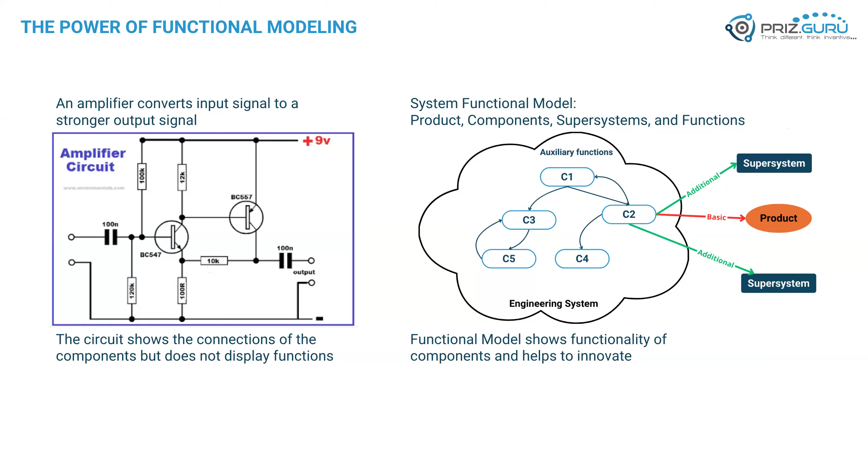As a definition, the functional modeling is an analytical tool that helps us define what matters - this is how we decide to call it. First of all, we learn how the system works in very small details, or in the details that we decide to go into. It defines the functional rank and problematic rank of each and every component, which is very important, and we'll talk about that in a moment.

It helps us solve problems as a result, because without understanding how the system functions, and without understanding what the system is even built for and what each component is built for, we can't make any decisions and of course can't improve the system. So functional modeling helps us do that. And of course it impacts what matters, because what we've seen - and I'm sure everybody in this room has seen it many times - people make changes to their systems all the time, but do these changes actually matter? Do they actually provide value? Many times the answer is no; we're making changes for the sake of changes and not for the sake of actually improving something.

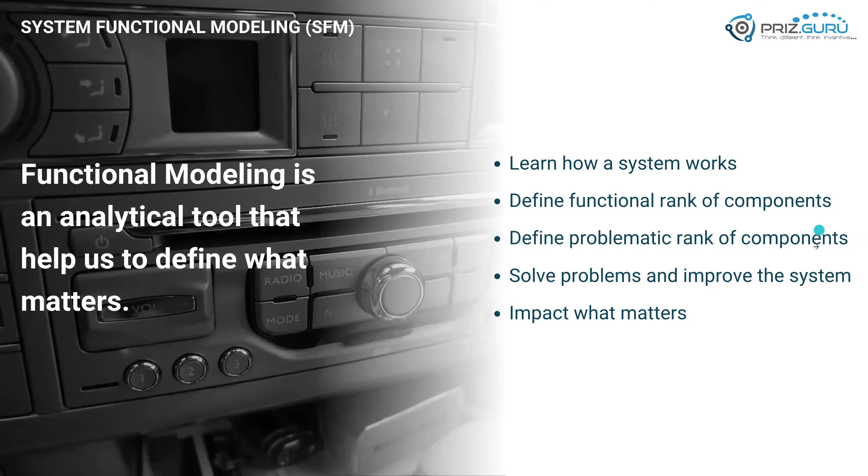Now let's talk about the fundamentals of functional modeling and how it's built, since we wanted to be a little bit more practical in this webinar. The core concept of the modeling is always the interaction between two components when you have a function between them. Usually one component applies a function to another component. It's as simple as subject, function, object, or function, subject, action, object.

So subject and object - the subject in this case is the carrier of the function, whoever is providing the function. And the object is whoever receives the function. The subject and object are the components that have the interaction within the system, where a function - and this is a very important definition - is something that changes a parameter of another component or of an object.

Did I miss something here, Anatoly? No, everything is fine.

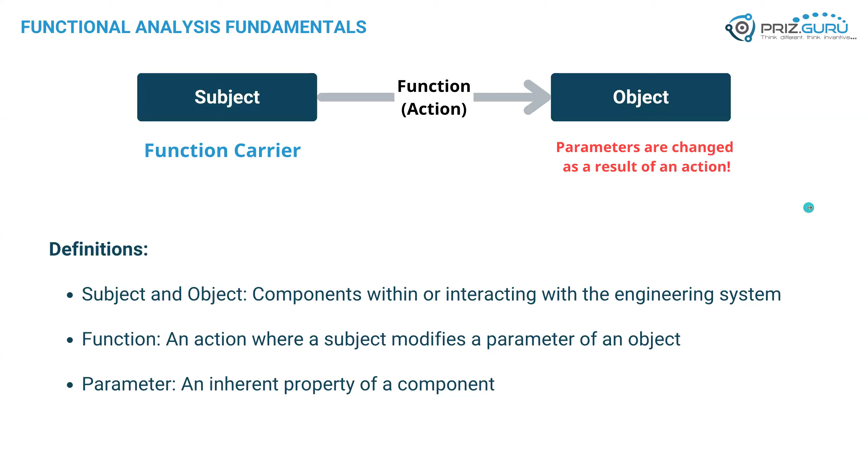So, subject, action, object - it's actually a very powerful thing, and we can call it in short the SAO, if anybody will. But when we're defining the subject, action, object, like the example here - the car moves a person -

the power here is that it actually defines two things. First of all, it defines the problem that this thing solves - we're solving the problem of moving a person. That's very important to understand. The other thing is it shows us the solution of how we actually do that - we're using a car, the car moves the person. So we have both of these things in this one formula: the problem we're trying to solve, and the solution of how we're solving it in this particular case.

But what does it mean? It means that once we understand the problem we need to solve, there's potentially much more solutions that we can apply to solve this problem. We can move a person not only by a car - we can use a truck, a person can walk. There are so many ways that we can move a person.

But also, car moves a person doesn't necessarily mean that this is the only thing it can solve. It can solve other things like moving cargo, moving different loads, mail, you name it. So this is a very powerful thing to understand - once we have that definition, we can be much more mindful about the problems we're solving and the solutions we can apply to it.

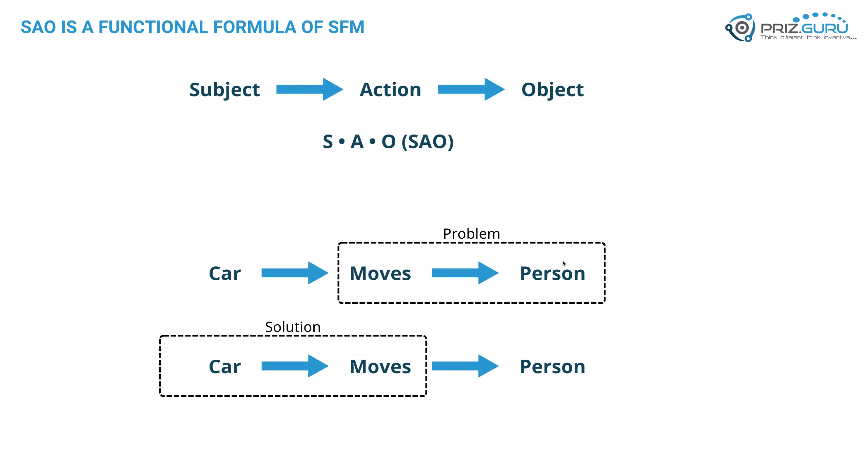So let's define a function, first of all. The function of a subject always results in a parameter change of an object. Again, that's a very important thing to understand - if there is no parameter change as a result of a function, it's not a function. Period, end of story.

If we're thinking about a beer - something that Anatoly likes to give as an example - it's not a function, because it doesn't change a parameter of anything really. But if we're drinking that beer, then yeah, we're potentially moving that beer and so on. So if we're following this rule, it's actually very easy to understand what is a function and what is not - it has to do with the parameter change of an object.

Now let's talk about the process of how we build a functional model. First of all, we need to describe the system that we're building it for. Something we've seen in a lot of engineering teams is that people don't necessarily think about a particular system - they dive into problem solving immediately without even understanding what the system or the problem space is in general. So we have to describe and understand in detail what is the system that we're trying to analyze with this functional model.

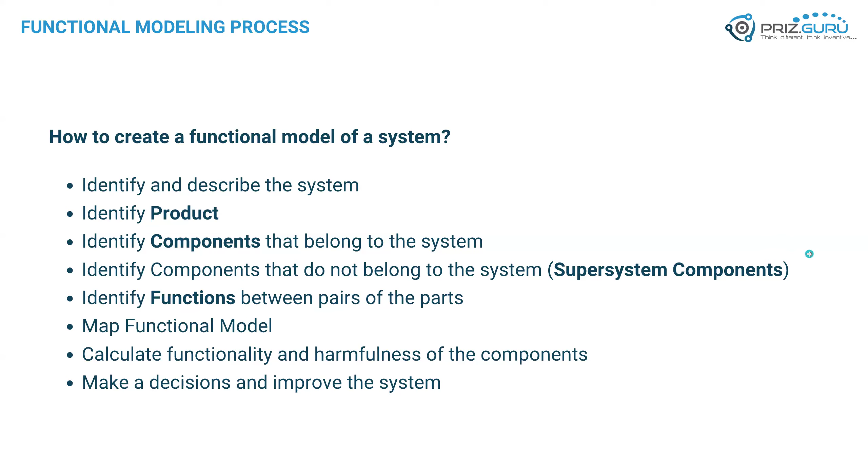Now let's talk about the product. We touched on this a moment ago, but how do you identify the product? First of all, usually there's one product for every system. It's a thing, service, or product that the system was built for originally, that it was designed for. Most engineering systems have only one product; we very rarely build a system with two products in mind. I can't even think of one at this point.

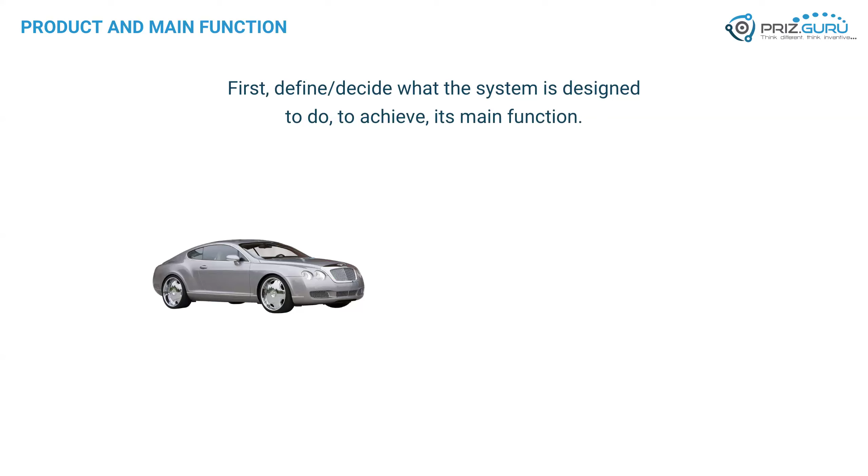Now, the product is the main function, what we call the basic function of the system. Let's take an example, a car. If the car is our system, what is the purpose of the car? The purpose of the car is usually transport — in this case, transporting people. So people must be the product of this system called the car. As you can see, the main function, the basic function from the system to the product, determines the actual product. And another thing we'll see in a moment: the product is always not part of the system itself — it's outside of the system.

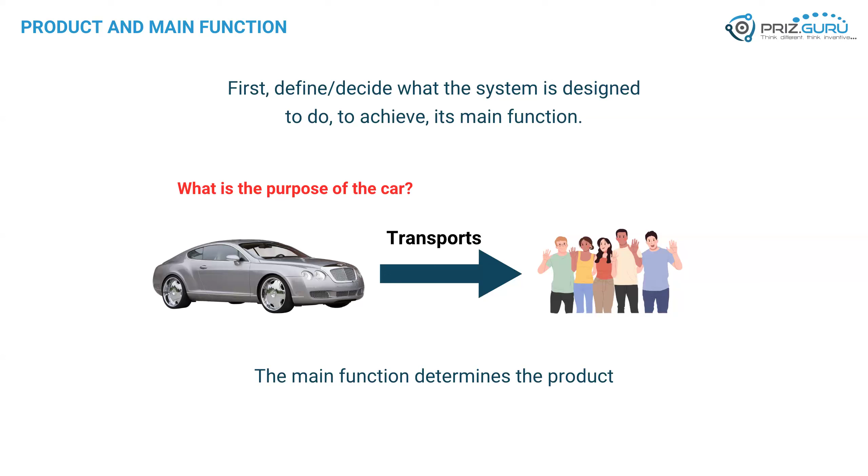Now, components, as an example, are something that builds that system. In this case, it could be wheels, brakes, transmission, the engine, and everything else that actually builds the car.

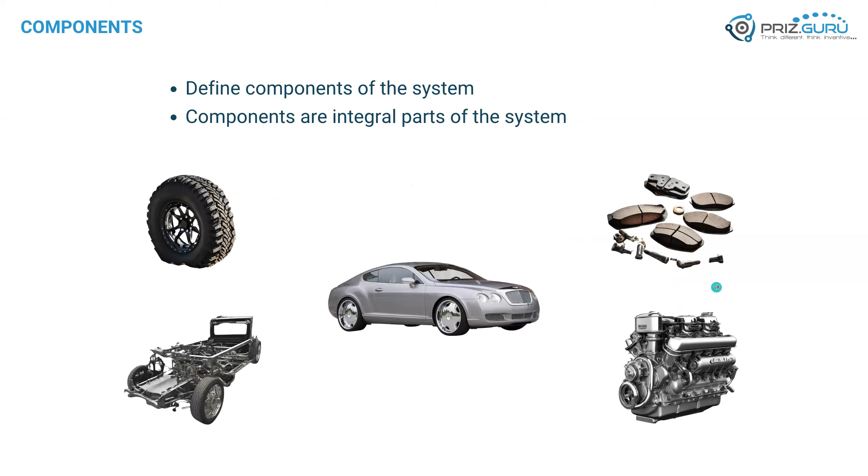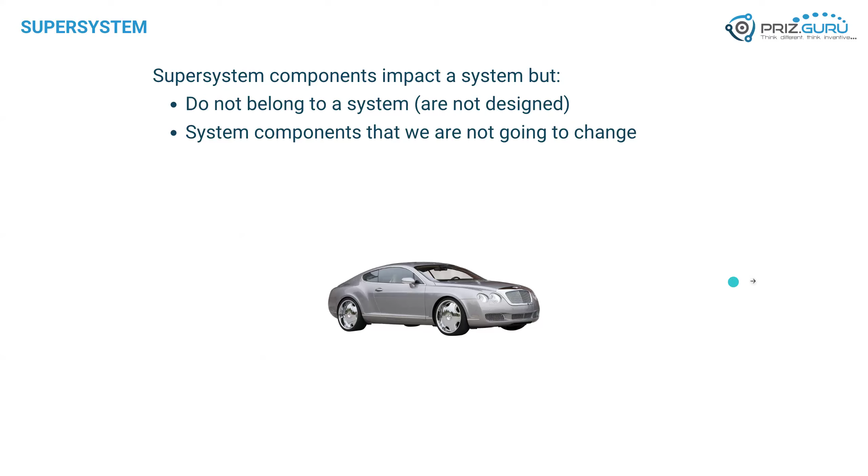Now the super system, as we mentioned, could be anything that affects the system, or in this case the car, or that the car affects — but we can't change it, we can't really control it in any way, and it's not an integral part of that system. Examples here: the air around us, rain or weather — not anything we can control. Pollutants, again around us, not necessarily what we produce. The road we drive on, and so on. There are potentially so many examples in just a car.

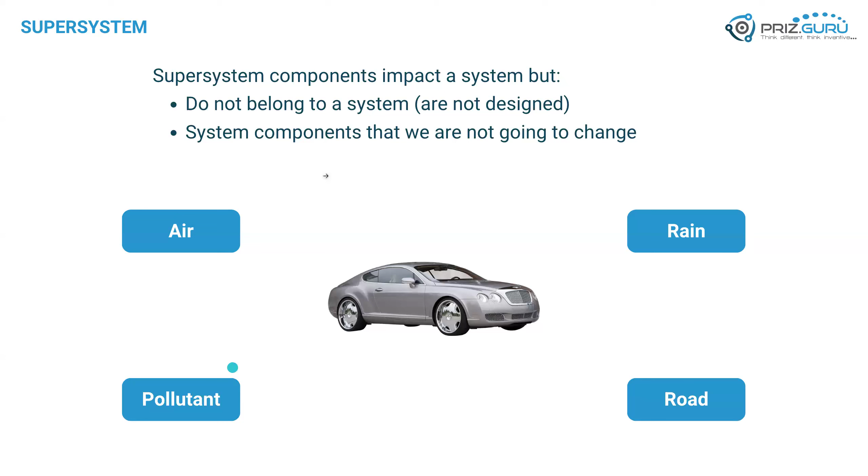Now, a typical functional model, repeated from a previous slide, can look something like this. There are internal, integral parts or components of the system that have auxiliary functions within or between them, and that's what constructs the engineering system. The super system components are something outside of the system, but the system is either affected by them or affects them. And then, of course, the product — the basic function is usually applied to the product. It's not always one function; sometimes multiple components apply the function to the product, but it's still a basic function.

Now, when we're defining these interactions and functions between the components, we want to be conscious about how we name them. Every one of these arrows actually defines a function, so we want to name them as simply as possible — a single word, ideally: something moves something, or something heats something else, and so on. We really don't want the entire story in there; it should be one single word. If it's not, it usually means we either don't understand the system or didn't break it down in enough detail to reduce it to one single word.

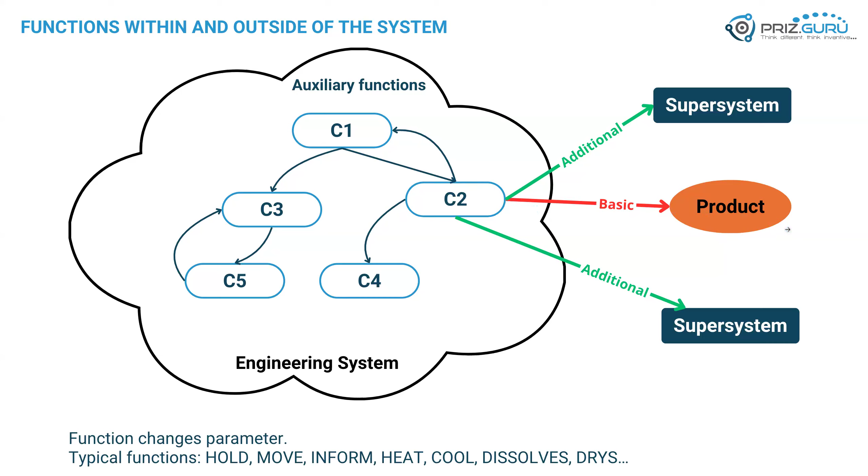Now, another word about functions is we can split the functions into two groups and then an additional subgroup. The two groups are a useful function and a harmful function. A useful function is something that the system was designed for, right? An engine eventually moves wheels. Engine moves something, right? That's a useful function that the engine was designed for.

But a harmful one we can treat as a byproduct, like an engine heats the atmosphere around us, which is not what we designed it for. We didn't design an engine to heat ourselves, right, to warm up, but it's there. There's currently nothing we can do about it.

And then the useful functions, or the designed functions, can potentially split into an additional subgroup, which is useful, excessive, and insufficient. An example would be a heater built to, for example, warm up water, right? But it could be potentially excessive, so it means overheating, right? Or insufficient, that's exactly the other way around. It doesn't heat fast enough or well enough, and so on.

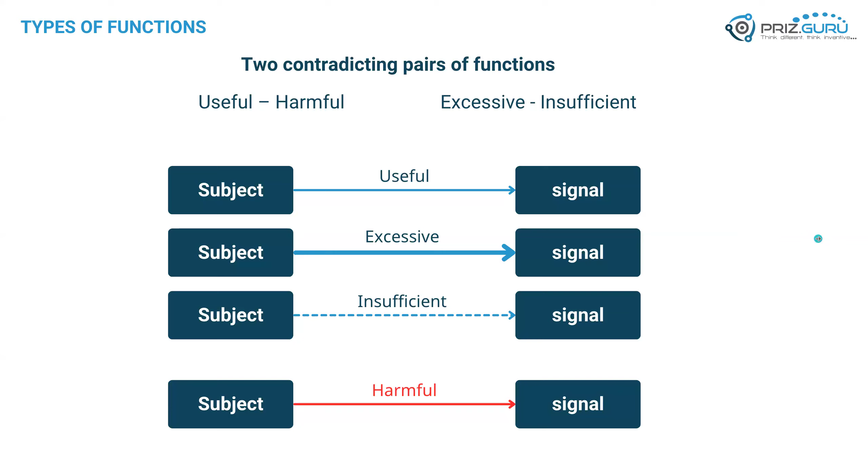Anything else I missed? No, everything is fine. I'm just trying to think. Yeah. So we will end with this, and we'll move to Anatoly's presentation on his side.

Okay, let me share my desktop. Can you see my desktop? Yes. Okay. So this is our website. And by the way, you can read a lot about functional modeling if you go to blogs. In order to get to the platform, you need to sign up or log in. I have my account in the platform. Let me log in. Okay.

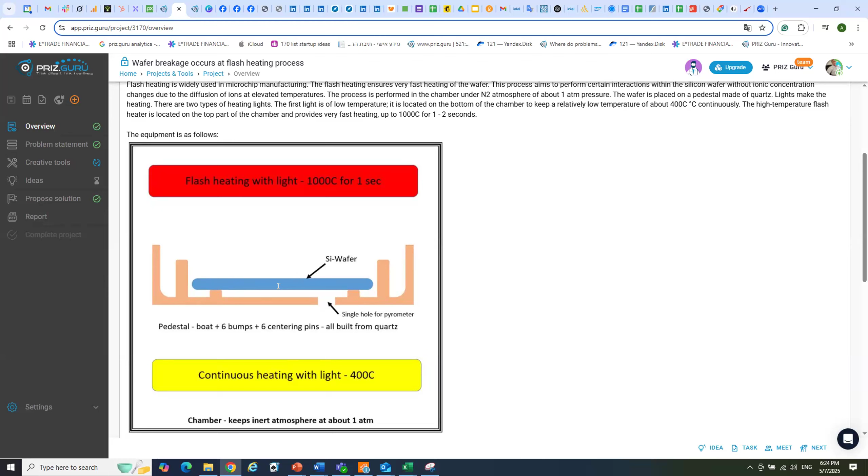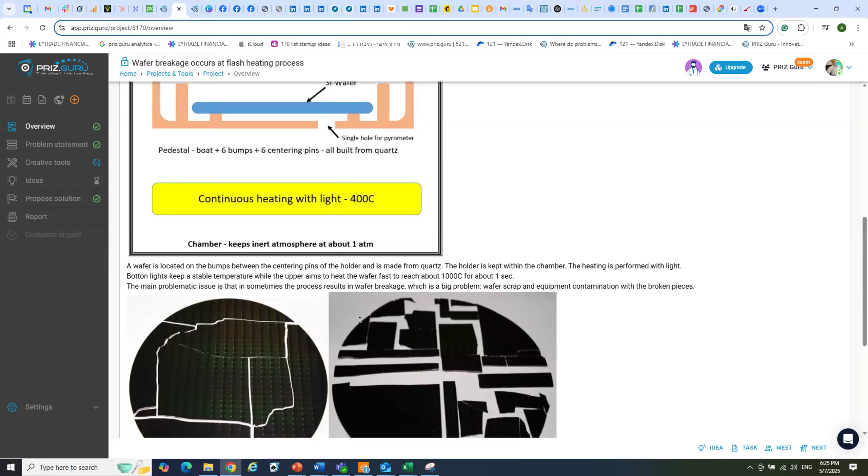And we have a flashlight or top light, which can heat the wafer up to 1000 degrees centigrade within 1 or 2 seconds. This process is needed to activate implants and not let diffusion of ions and atoms happen within the wafer. And what happened? Relatively often, the wafer got broken. This is a breakage. It's a pity. It costs a lot of money, and you need to clean up the tool after that.

We analyzed the root cause with other tools like the cause and effect chain, and we found that the wafer jumps and hits these pins. By the way, the pedestal contains 6 bumps, and the wafer is located on all these bumps, and there are 6 centering pins, and the wafer flies, hits the pins and gets broken. Okay, what to do?

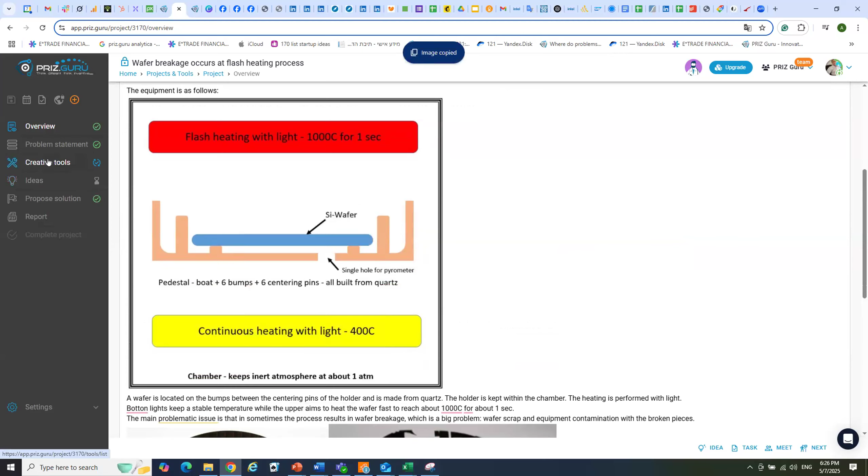Let's create a functional model. I will pick up this picture and we'll use it. We go to the creative thinking tools. I open a new one. Functional model is here. And if you forgot how to use this tool, you can click learn more and read a comprehensive explanation of how to use this tool. And let's go. So on the first page, we see a description of your system.

Okay, and we can write wafer breakage, and I will pick up this picture. We will need it for creation of the functional model. And let's create a model. So product, how to define the product? Very easy. We should ask ourselves what this system was built for. Very easy. The system is built to heat the wafer.

Product is wafer. Great. We have chamber. Let me change it to the component. We have chamber, and this chamber, we have a super system. We have air. Why do we need chamber? In order to stop air. Okay, we have air, and air is a super system. By the way, I can replace it from component to super system. Doesn't matter, and I can manage it, move it, or so.

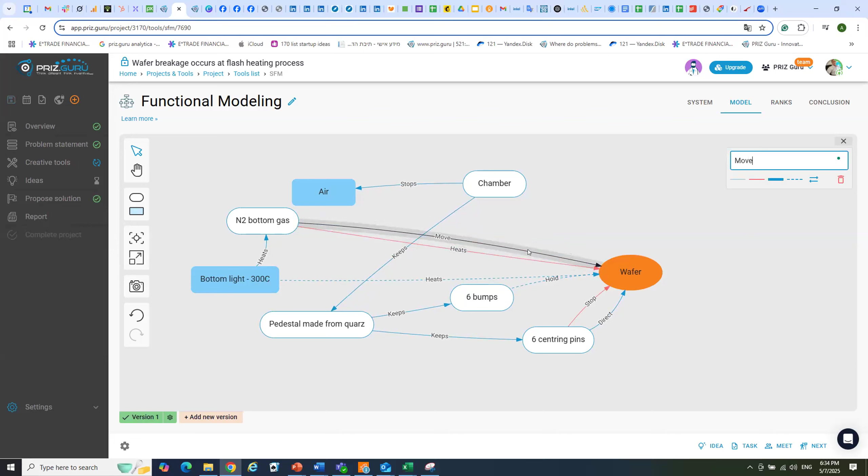So we have bottom gas, nitrogen bottom gas. The gas is located here and has different temperature and different pressures. Therefore, wafer moves. So this bottom light heats nitrogen bottom gas, and also heats wafer, which is not so good. We don't need this gas to heat the wafer. More than that, it also moves the wafer, which is also harmful.

And what do we have more? We have a nitrogen top gas. This gas is over here at the top part. What's happened? This bottom gas, first of all, moves. It's trying to mix with top gas. So it moves, and it's not good. No, it's okay, we can leave it. Okay, I agree. And the top gas, the opposite. It also moves. Let's keep it.

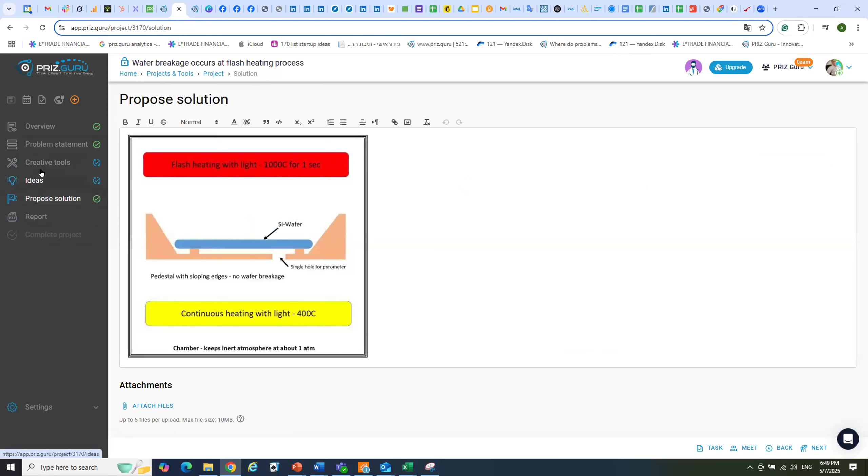I can show you. Of course, we knew how to do it, and it should be something like this. Of course, we solved this problem. I just wanted to show you what idea is there. And if I go to this model, I don't need it. It will never stop, and I can remove this function.

And if I go to ranking, I can see that the new version is much better. Guys, we just don't have enough time. It's hard work, but we can continue to change the model, and we can again make a copy and, for instance, remove nitrogen or reduce pressure, or just work in the vacuum, or maybe we need some keeper clamping the wafer.

We can simulate different ideas and different constructions. So this is hard work, and this is so-called innovation, because a lot of people think innovation is when they sit in the conference room, drink coffee, and just throw ideas. They say it's brainstorming. I always explain it's not brainstorming, it's brain guessing, because innovation is very hard work. It's systematic work with the system. We should understand our system, and we should use the instruments that help us to solve problems and to innovate.